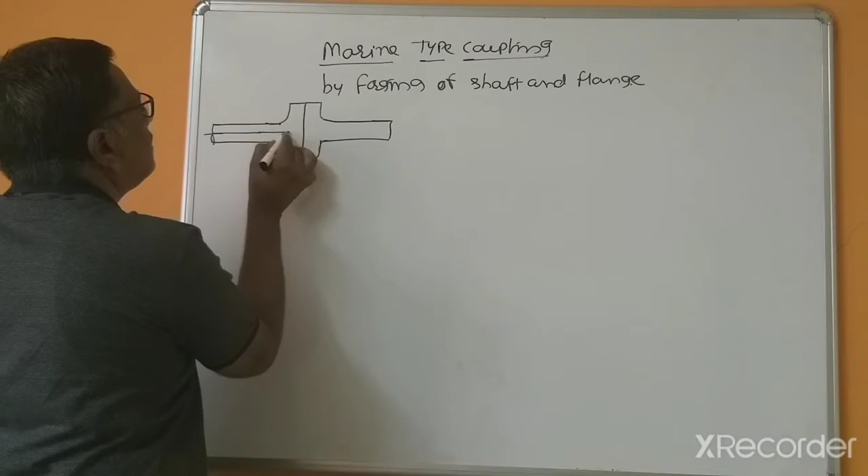Here a taper is provided. This taper is provided at some amount, and here this is a bolt. This is a headless bolt.

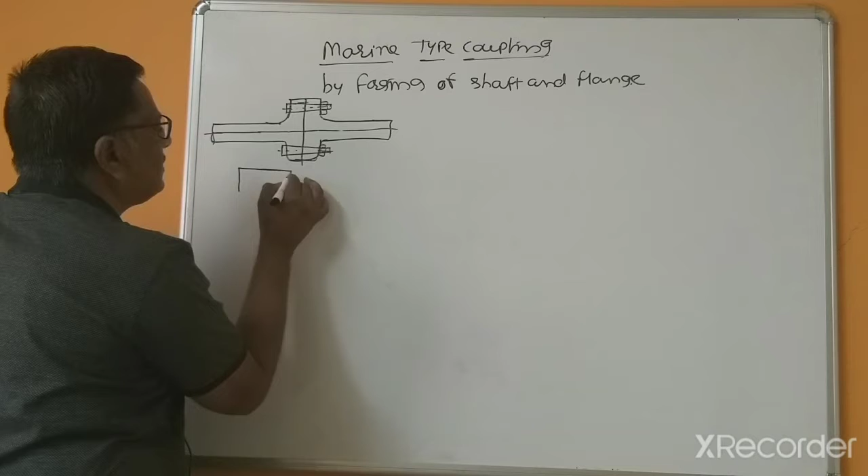The taper is generally shown by such type of threading, and this is a headless taper bolt. This taper is generally 1:32.

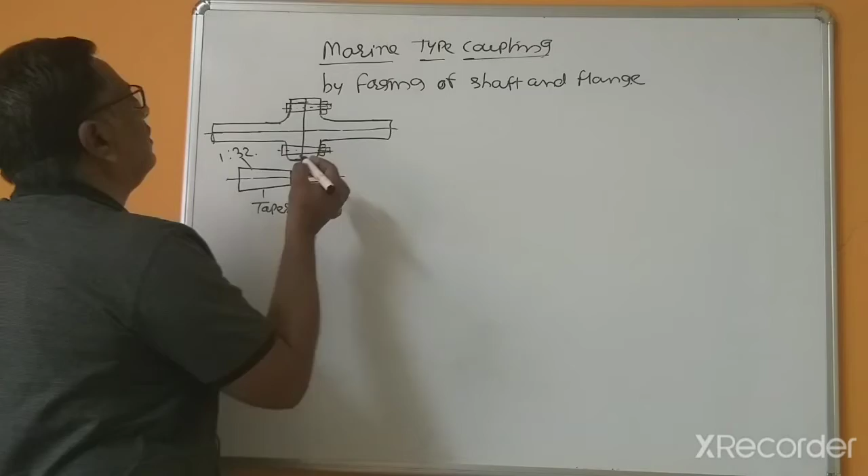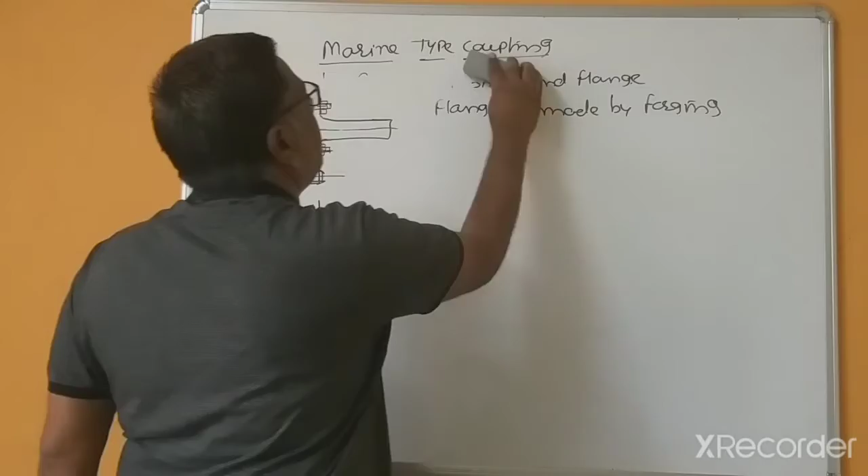So by forgings these flanges are made, or you can say flanges are made by forging. This shaft also is manufactured by using forgings, hammering. Because of these forgings, the strength increases.

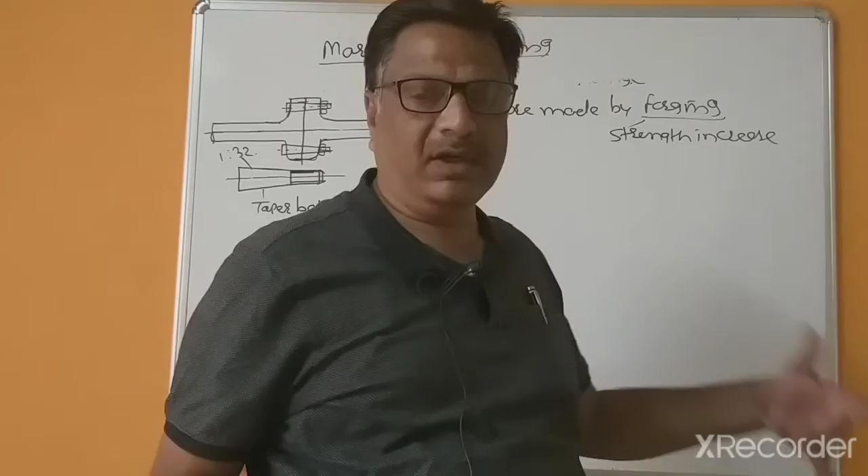A higher factor of safety is to be used, because if the coupling fails, this marine coupling is running in the seas. So the strength of the coupling, meaning the factor of safety or reliability factor, is very important. That's why this is made from forging.

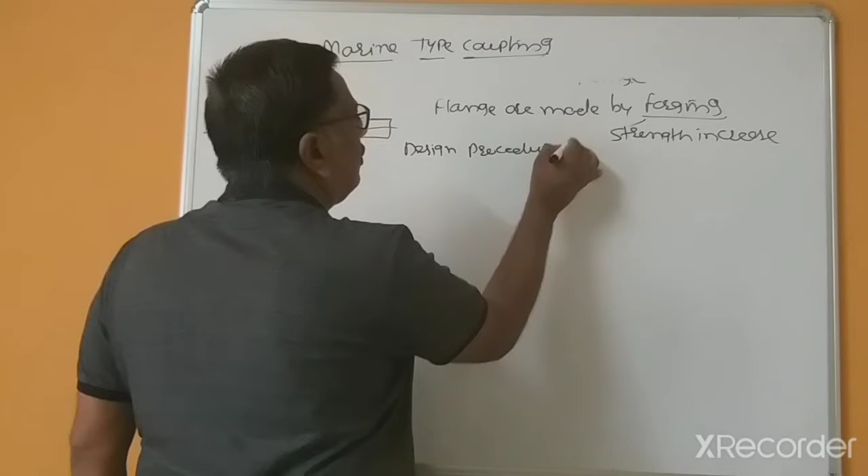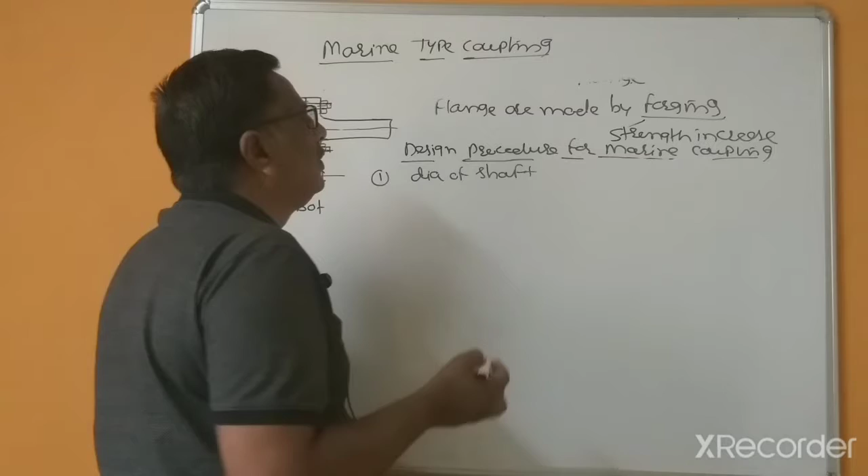And here is the design procedure for marine coupling. This is a very small design procedure. First is the diameter of the shaft, input and output shaft. This is the minimum diameter of the input and output shaft.

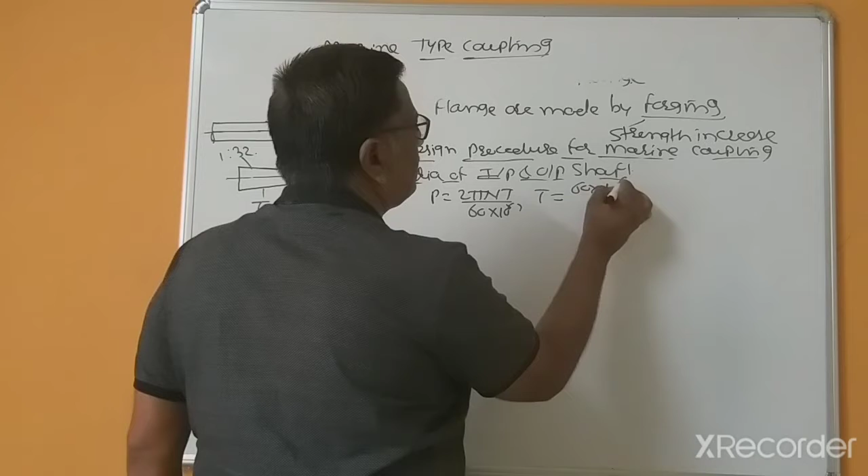You can find this by using P equal to 2 pi NT divided by 60 into 10 to the power 6, so T equal to 60 into 10 to the power 6 multiplied by P divided by 2 pi N. Here T is in Newton mm, P in kilowatt, and N is the RPM.

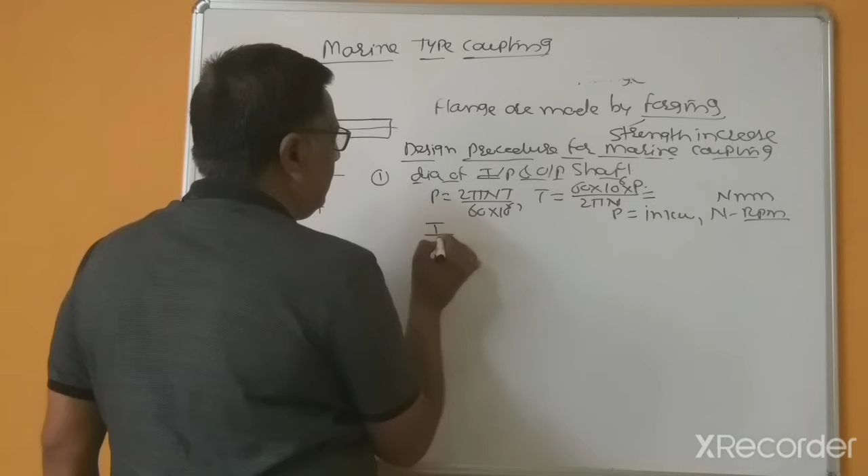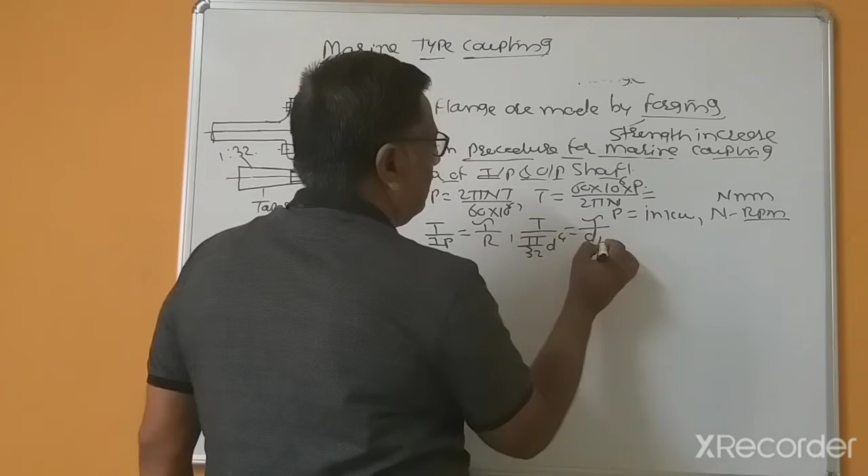By using these relations, T divided by polar moment of inertia equal to tau divided by R. Since this is a solid shaft, T divided by pi by 32 d raised to 4, tau divided by d by 2. So tau equal to 16T divided by pi d cube, or d equal to cube root of 16T divided by pi tau. This is the first step, diameter of the input shaft.

Now, this is not for checking purpose, this is the design diameter of the shaft.

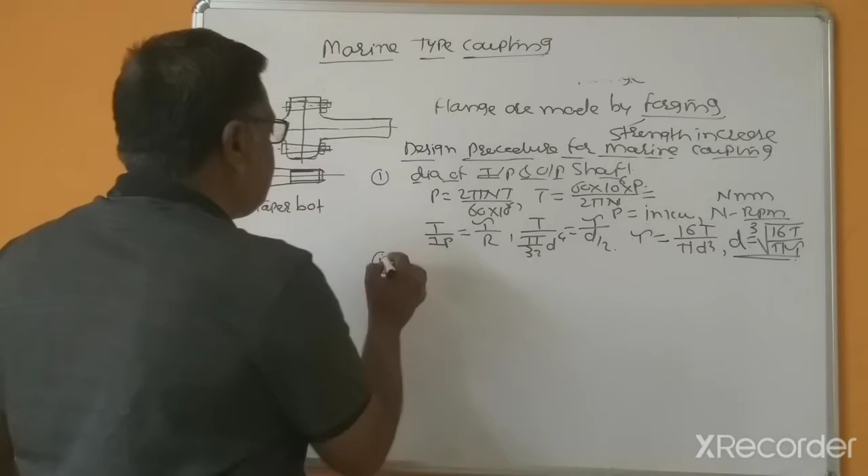Second step, because here another component is the bolt, so design of the bolt. But before that, dimensions of the coupling. These are the various dimensions about the coupling.

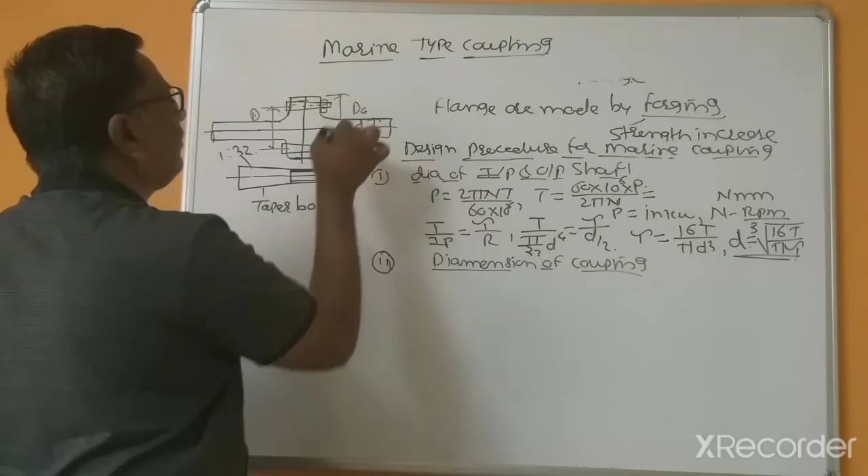This is the outer diameter, and this is the pitch circle diameter, capital D, and this is the small d. So the pitch circle diameter PCD equal to 1.6 times d, and the outer diameter equal to, this is a general relation, 2.2 times d.

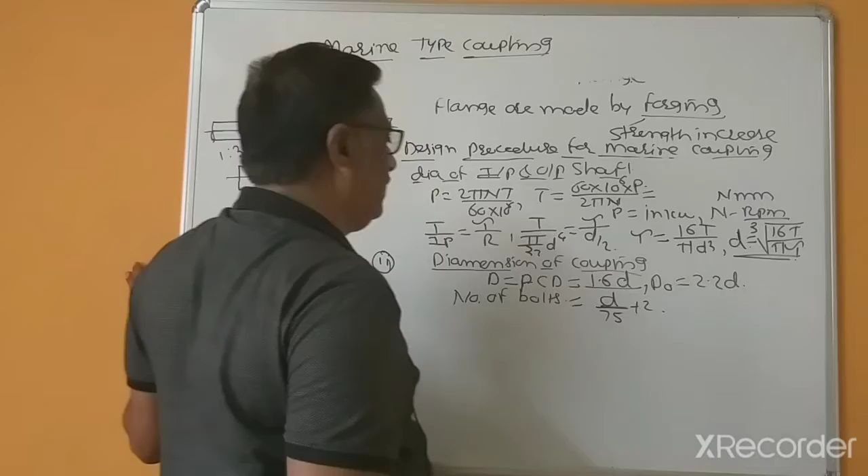And the number of bolts equal to d divided by 75, plus 2. This is the relation for finding out the number of bolts.

Next, this is without a key, because the flanges are made by forging, so there is no need of keys.

Last step, design of the bolts. Here you can add a checking step, checking of the coupling.

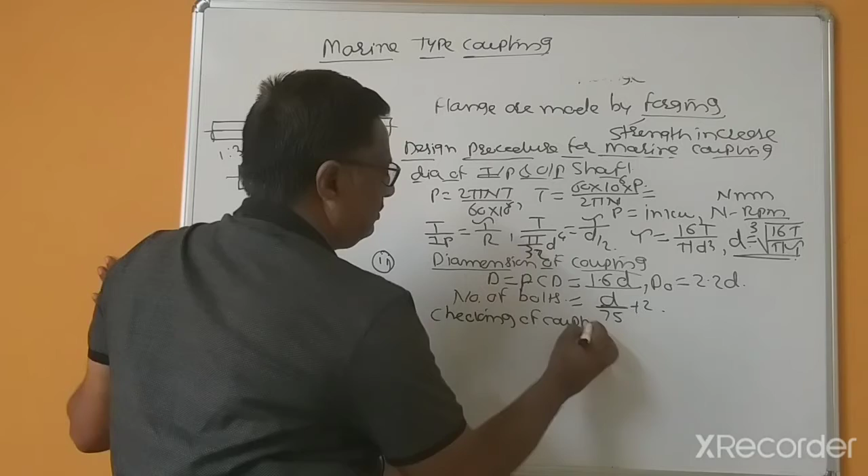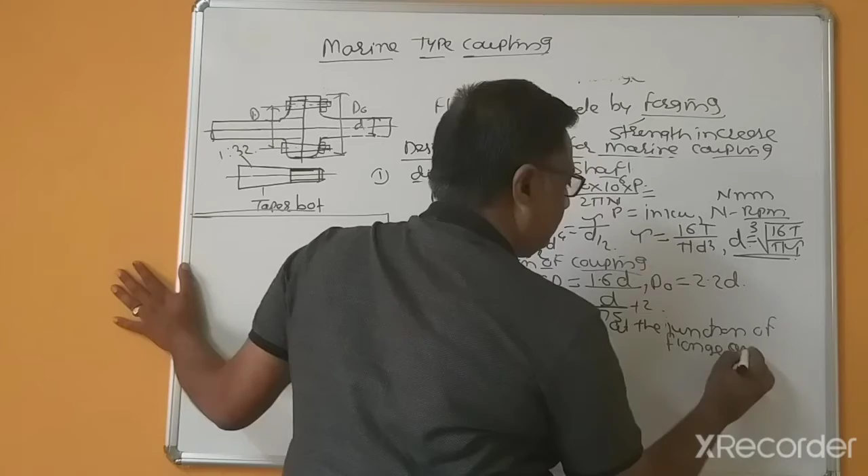After that I will add checking of the coupling, because chances of failure of the coupling are here at the junctions, at the junction of flange and hub. Here this is the flange, and you can say this is the shaft.

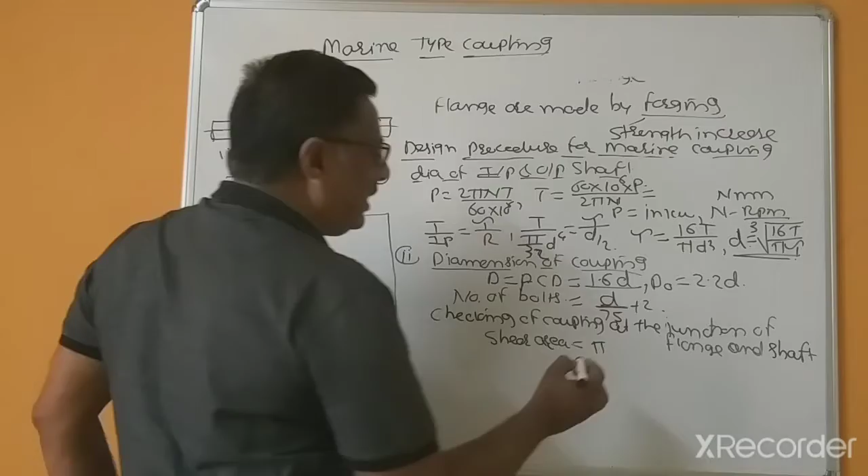So the shear area equal to the shear area circumference, d is the diameter, pi d, and this t is the thickness.

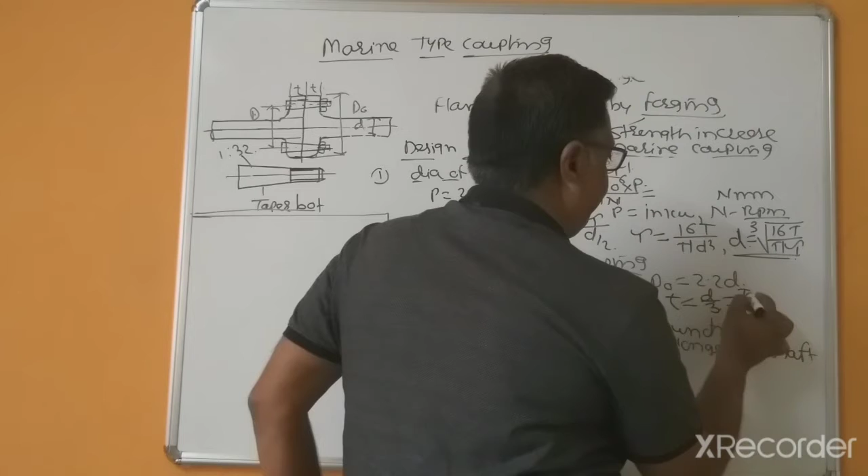Yes, t is the thickness, and this is d by 3, thickness of the flange. This is also important, d by 3, thickness of the flange, multiplied by d.

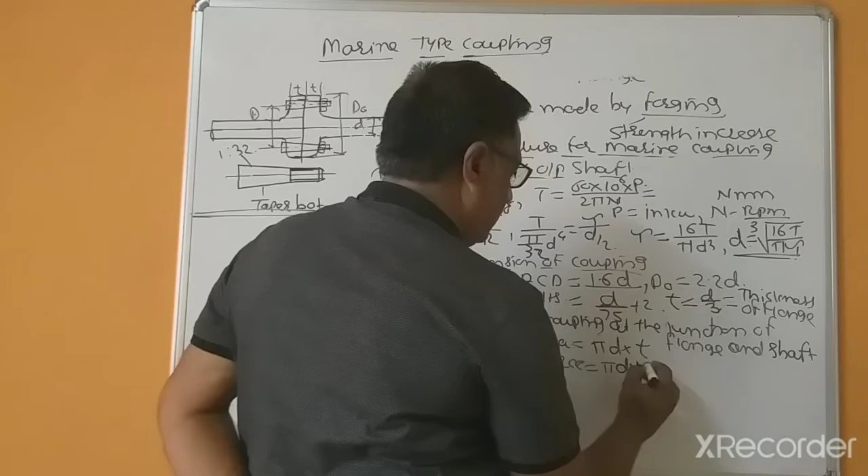Now shear force equal to pi d, sorry, this is t, because this is t, pi d into t multiplied by tau. Tau is the shear stress of the material, and torque equal to

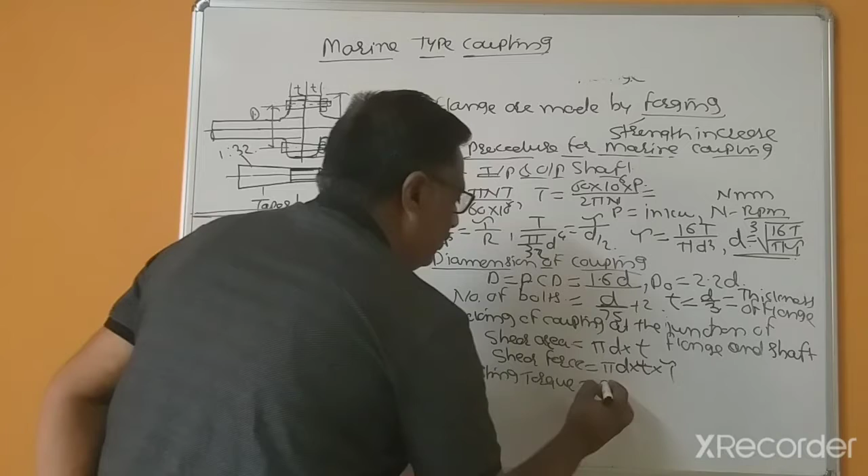resisting torque equal to shear force multiplied by radius. So that's why here we can write pi d t into tau, radius equal to d by 2, and this is t.

So tau equal to 2t divided by pi d squared into t. Here's check design is safe or not safe.

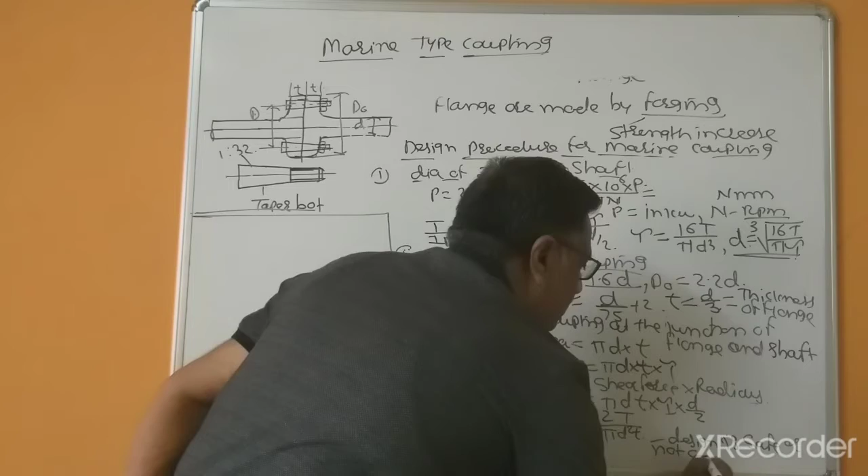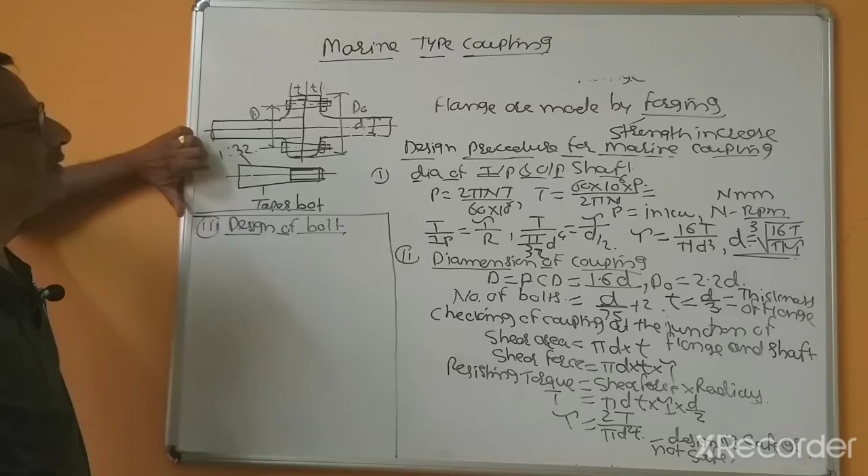This is second step, and the third step. So this is last step, design of bolt. So this bolt is the, and here's this is mean diameter d1. d1 is the mean diameter of a bolt,

right? So that's why shear stress and chances of failure is due to direct shear stress. So that's why tau equal to formula force acting, and this is P divided by pi by 4 into d1 squared, and this is force acting on each bolt. Otherwise I will write this is P equal to force acting on each bolt.

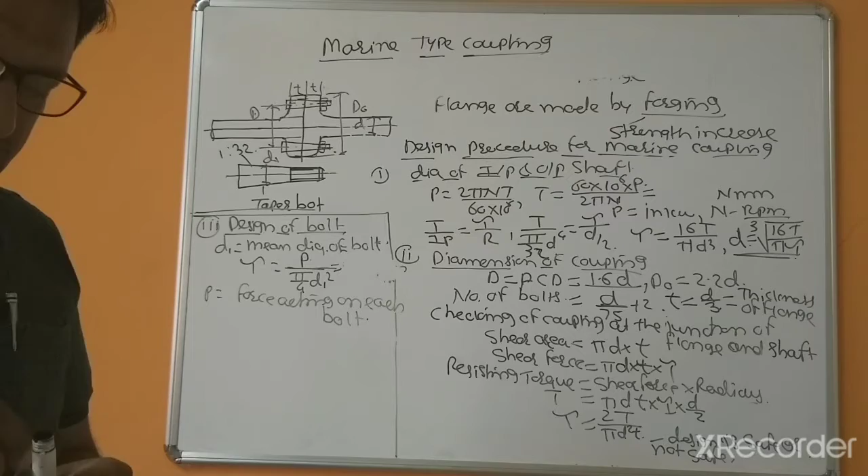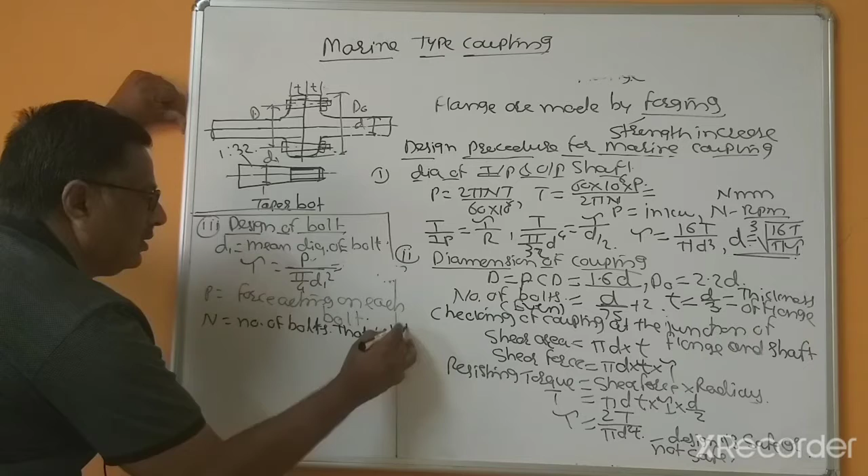Alright, so P equal to, how you can calculate N equal to number of bolts. Here's one sentence is required. Yes, I will add here, in brackets, this is even. Bolt should require is the even. So N is the number of bolts and that is to be even only.

So that's why here's number of the bolts equal to this formula N equal to, and force acting on each bolt, how you can calculate: T equal to N into P1 multiplied by this is capital D divided by 2, or P1 equal to 2T divided by dn.

So that's why here tau equal to 2T divided by dn multiplied by pi by 4 d1 squared, or d1 equal to 8T divided by pi dn into under root, and this is tau. So here you will get d1 is the diameter.

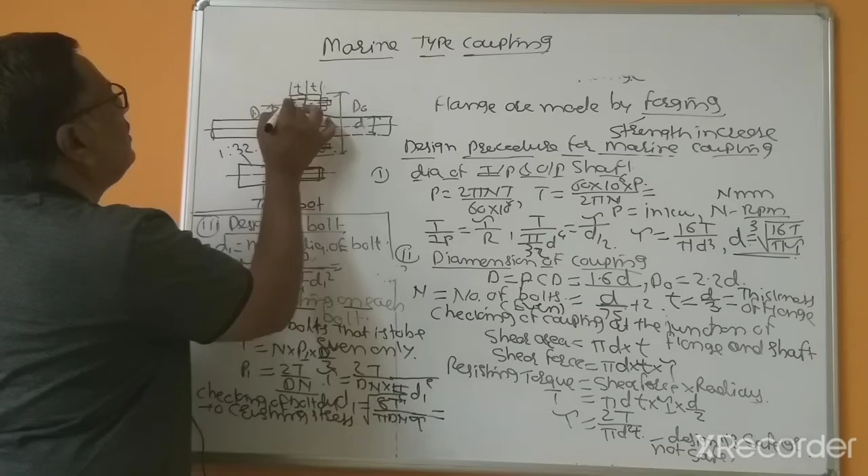Now checking purpose, checking of bolt due to crushing stress. So this is last step. So here's failure of the bolts due to crushing, because this area is the crushing area, this area is the crushing area. So that's why D and this T is the thickness.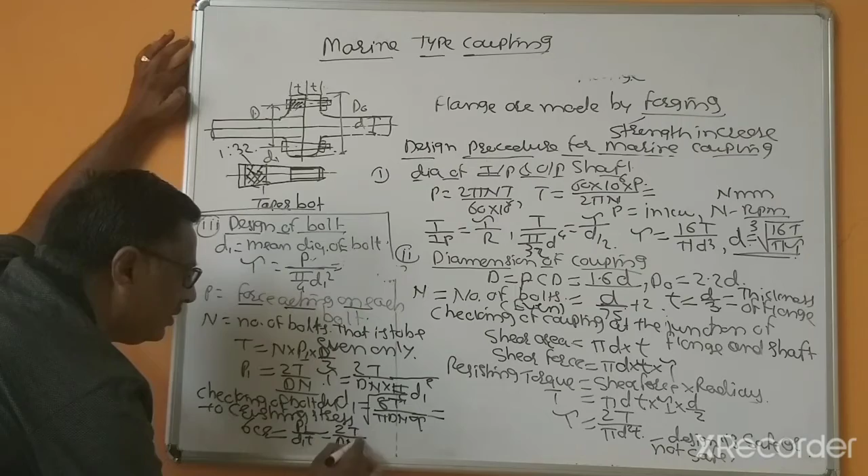So that's why checking purpose, crushing stress equal to P1 divided by area D1 into T, and P1 equal to 2T divided by dn into d1 small t. So this is the last step.

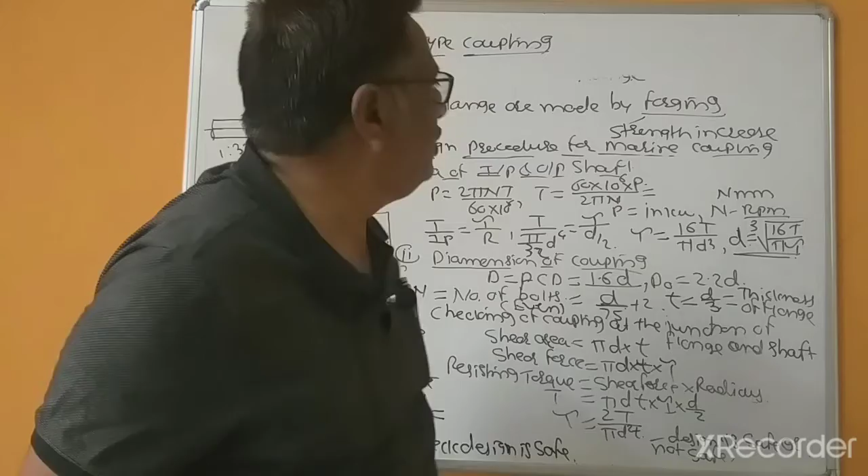So here check design is safe. So this is last step. That's why within 3 steps you can design the marine coupling. So problems are easy for marine coupling. So you should only know what is the design procedure.

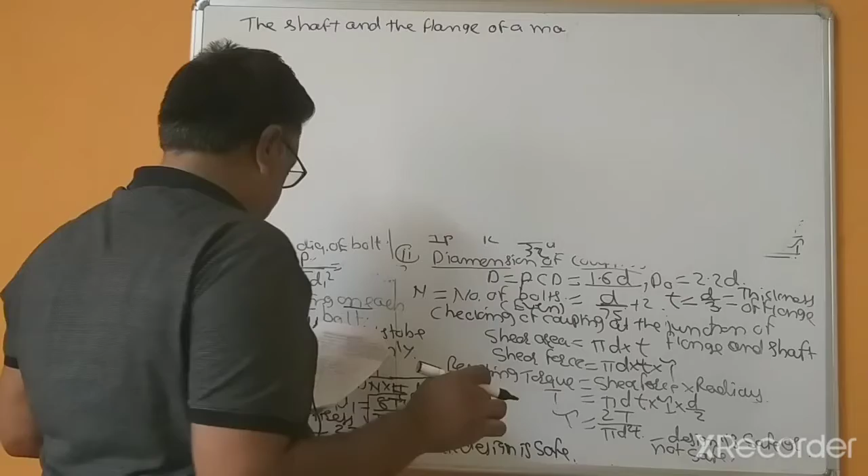So first note down today's first problem. The shaft and the flange, the shaft and the flange of a marine engine are to be designed for flange coupling

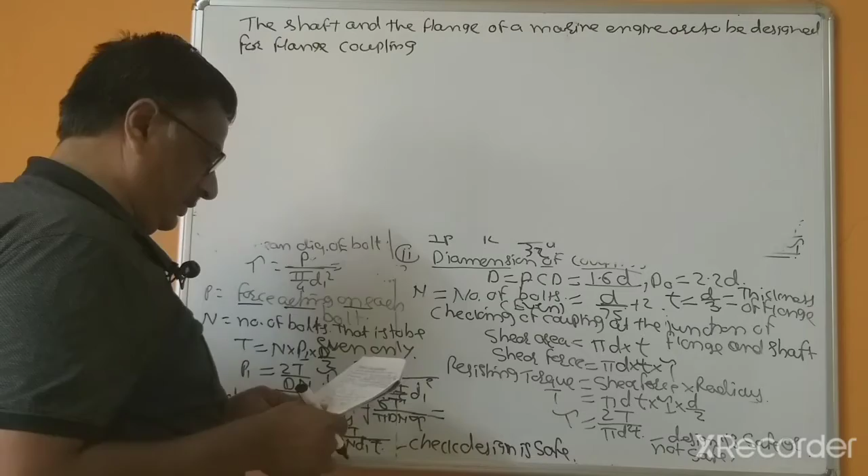in which the flange is forged on the end of the shaft, the following particulars are to be considered in the design.

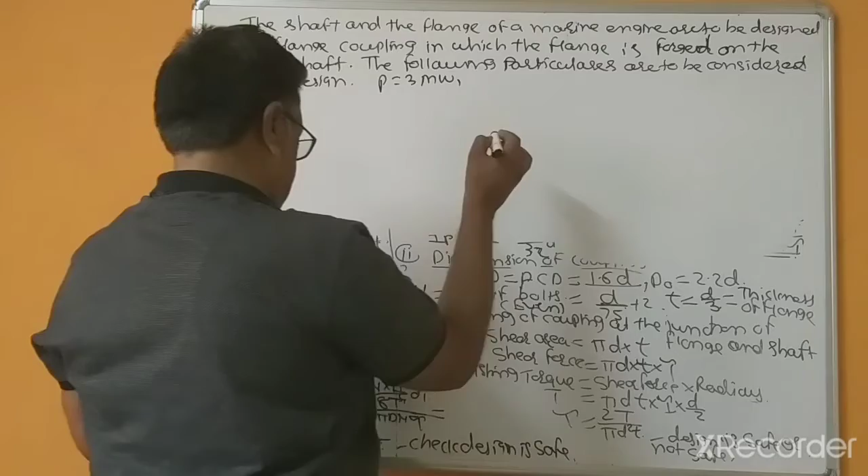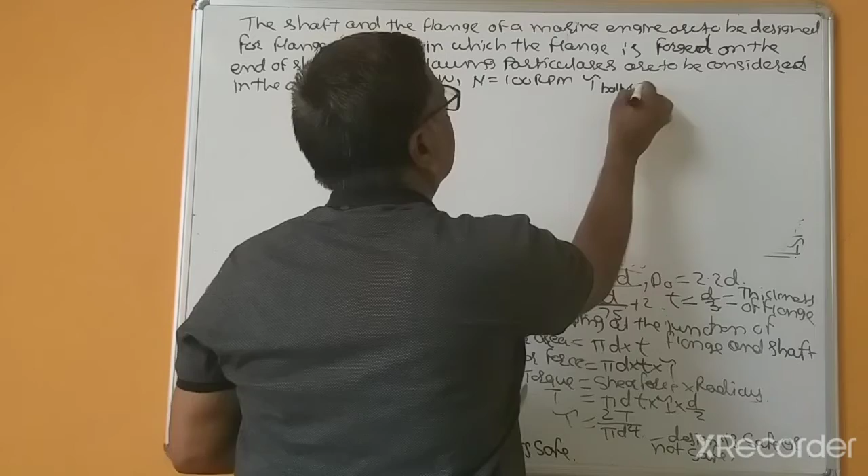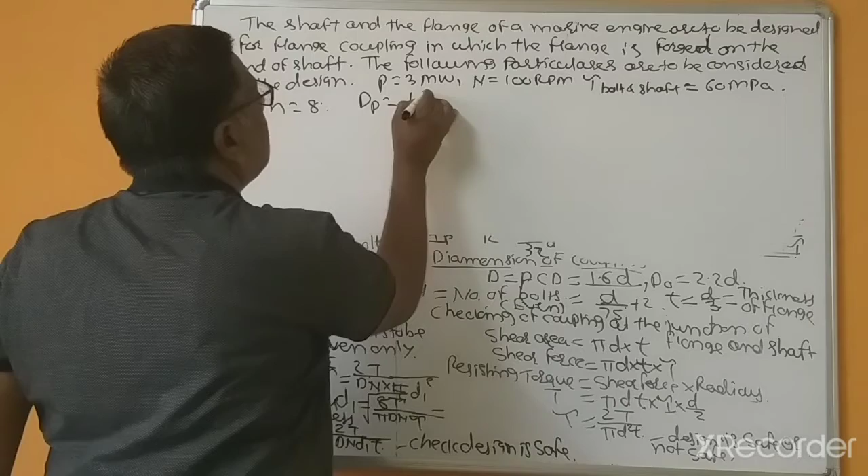P equal to 3 megawatt, capital N this is 100 RPM, tau for bolt and shaft this is given 60 megapascal, small n equal to 8, dp pitch circle diameter, and this is given dp, pitch circle diameter. P stands for pitch circle diameter. This is a standard empirical relation given for diameter of shaft.

So this is important data. Right? And I split our board into 3 parts. First step, design diameter of input and output shaft. So this step is common for every coupling.

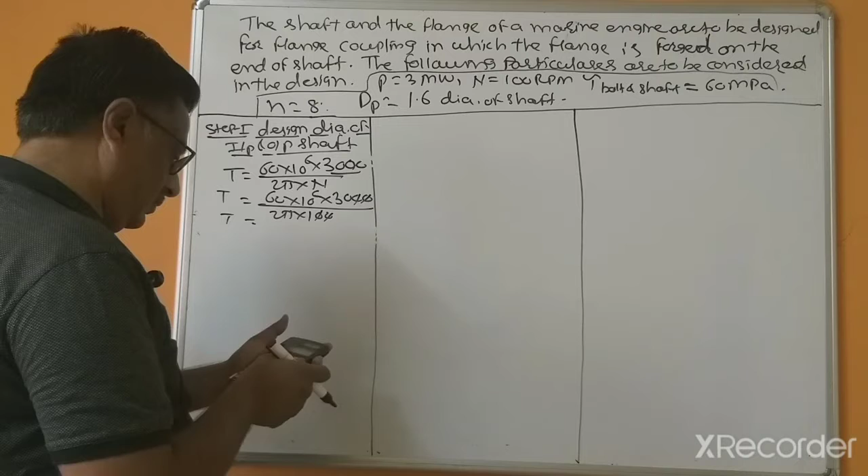So that's why T equal to 60 into 10 to the power 6, and this is 3 megawatt. 3 megawatt means kilowatt, this is 3000, divided by 2 pi RPM, equal to N is the RPM, 60 into 10 to the power 6 multiplied by 3000 divided by 2 pi RPM equal to hundreds, and this will get cancelled.

60 into 10 to the power 6 multiplied by 30 divided by 2 divided by pi, and this is equal to 286,478 into 10 to the power 3 Newton mm. And D, diameter of the shaft, by using the relation 16T divided by pi into tau equal to, so that's why this is 286,478 divided by, no necessary to 10 to the power 6. We already consider this is pi into tau equal to 60, and this is cube under root D equal to

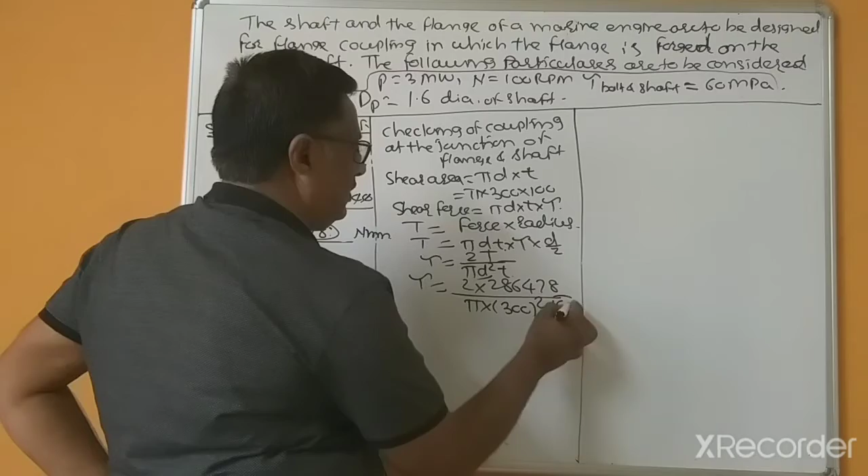This is 286,478 divided by pi into d, where diameter is 300 squared, t equal to 100, tau equal to 286,478 multiplied by 2 divided by pi divided by 300 squared divided by 100.

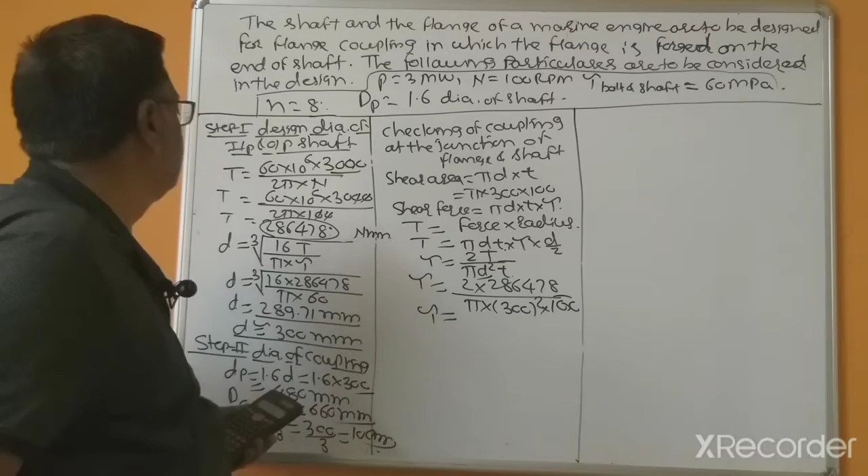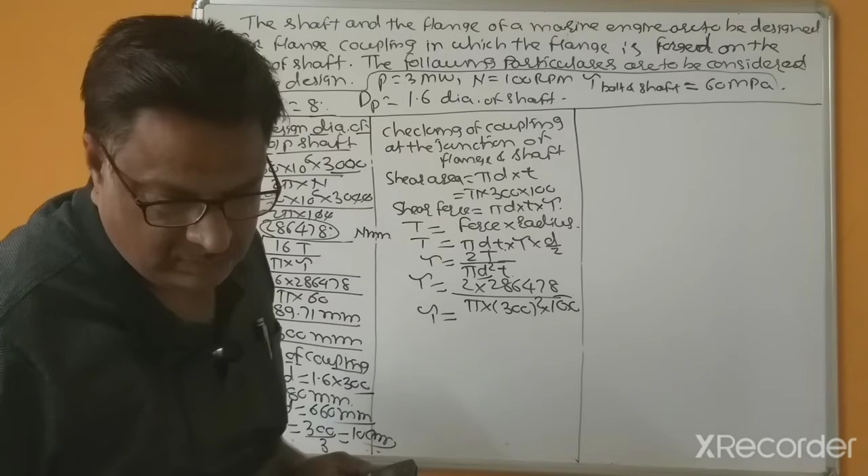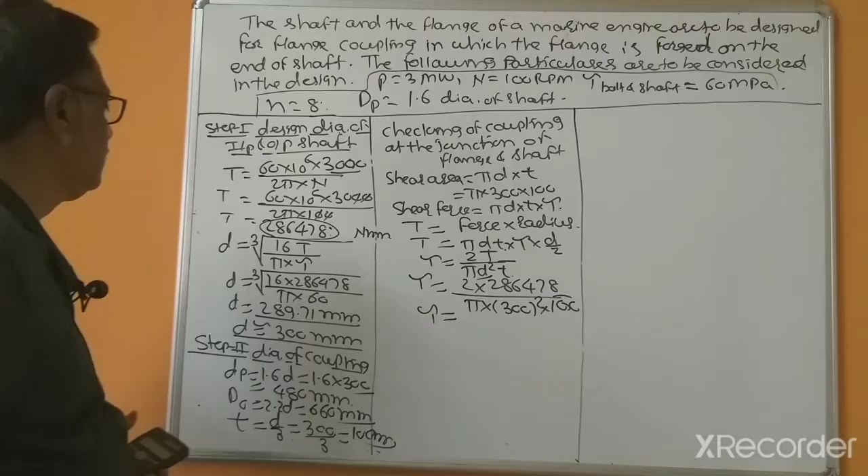I wonder if I did any mistake because I got this is 0.20. So I did make a mistake, as this is 30, this is 10 to the power 3. This is correct. That's why here, because this is very large, 10 to the power 3.

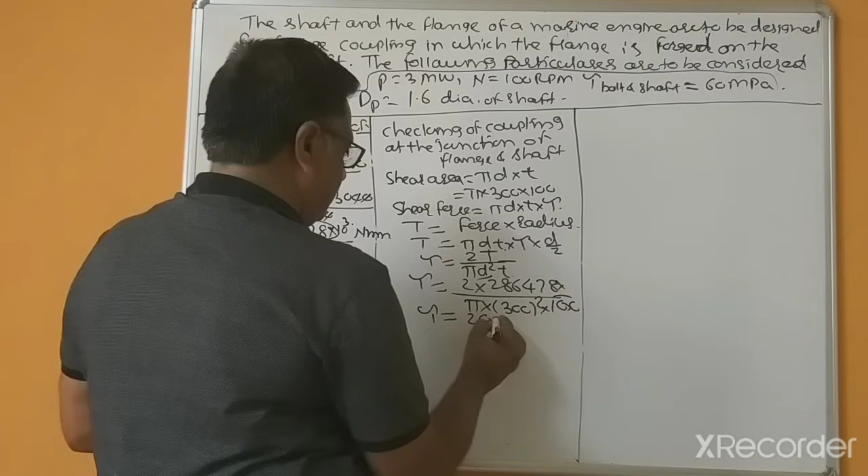This is 20.26 mega Pascal. That's why the design is safe.

Second step over. Third step, now step third, design of bolt.

So for design of the bolt, T equal to, yes, number of the bolts, and this is given as 8 number of bolts, and yes, P is the force acting, and this distance equal to d by 2. So that's why torque equal to force acting P into total number of bolts N into d by 2, or force means this is 2T divided by dN.

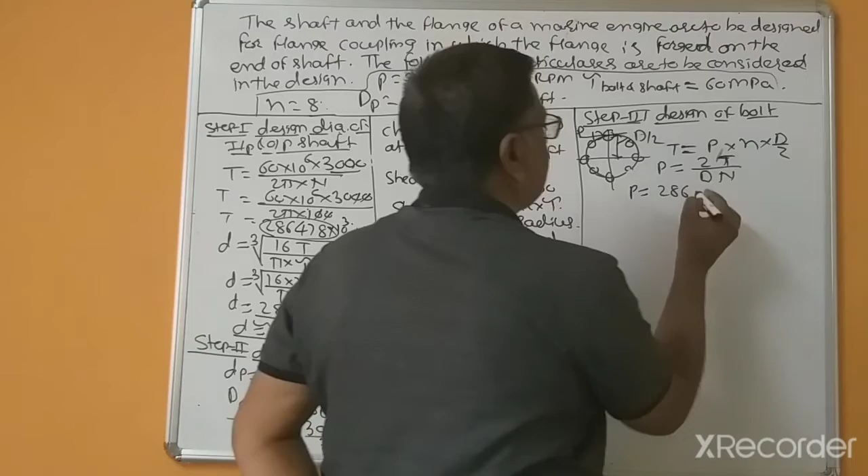286,478 into 10 to the power 3 divided by, and this is capital D, pitch circle diameter, and this dP is 480, and this N is the small n, and this is given number of bolts, 8, that's why this is 8.

So force acting on each bolt: 286,478 multiplied by 1000 divided by 480 divided by 8, and this is 74,603 Newton.

This is clear. And force acting's direct shear stress equal to tau equal to force divided by pi by 4 d1 squared. So that's why d1 equal to under root of 4P divided by pi into tau.

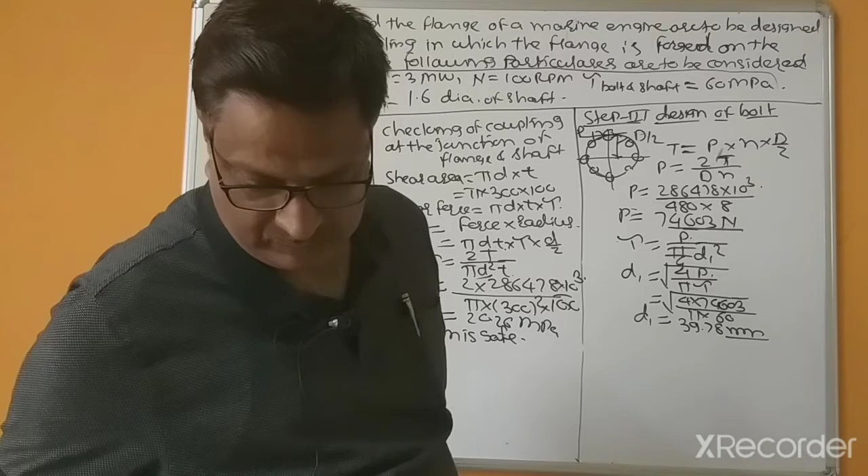I will check this because this is the first problem, so I check these answers. This is 148. I will check these answers because this is different.

Why is this different? 286,478 multiplied by 10 to the power 3 divided by 480 divided by 8. This is correct.

So what may be the answer is, this is our answer. So as per our design process, d1 equal to, but my answer is different. So that's why D1 equal to approximately 40 mm. So this is the mean diameter.

Now checking up bolt for crushing, because this area is the bolt cross section, so this may wear due to crushing, likewise may wear out. So that's why D is the diameter and T is the thickness above the flange. So crushing stress equal to formula P divided by D1 into T.

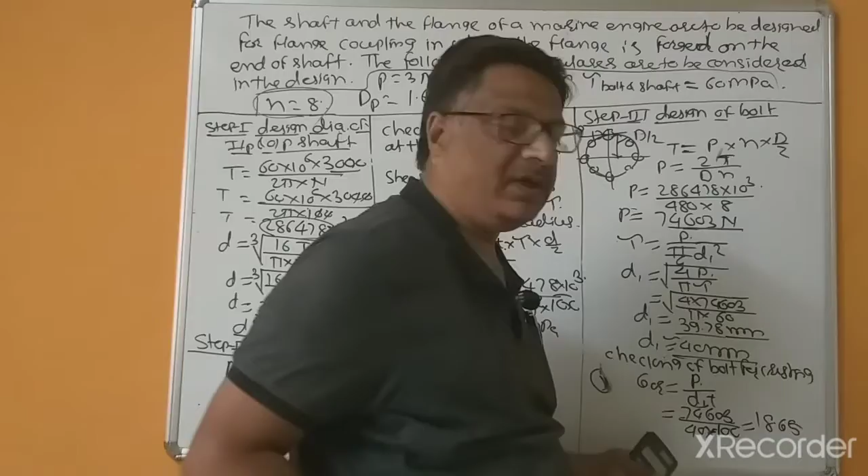So this is the first problem. We'll see the next problem.

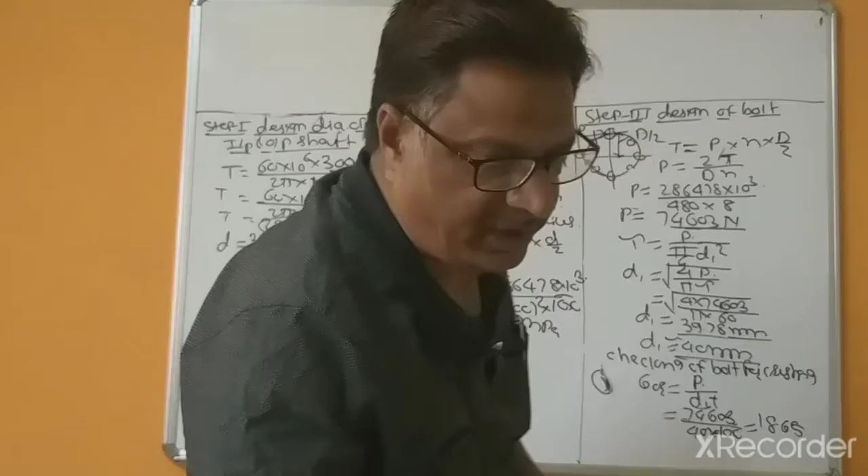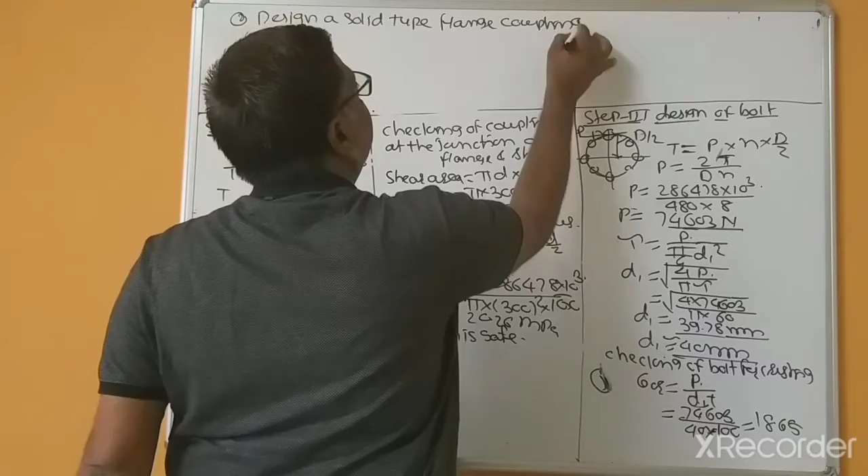Design a solid type flange coupling. Second problem: design a solid flange coupling for connecting a turbine shaft.

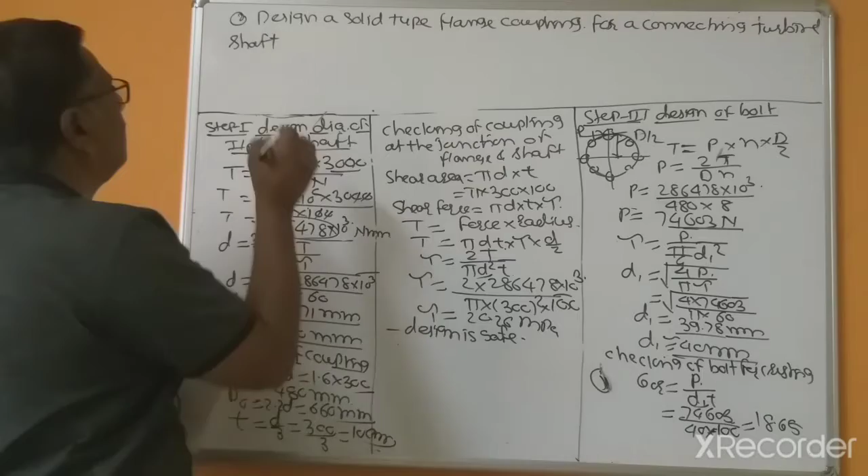Transmitting 5 megawatt power - this is important, 5 megawatt power at RPM - this is also important, 3000 RPM. The permissible shear stress for bolt.

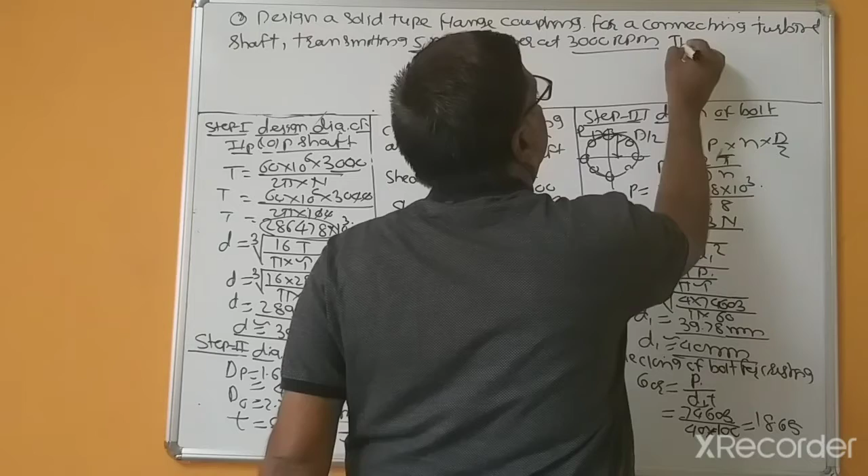The permissible shear stress for shaft and bolts are 90 megapascal and 85 megapascal respectively.

Assume there are 6 number of bolts required. So this is the given data.

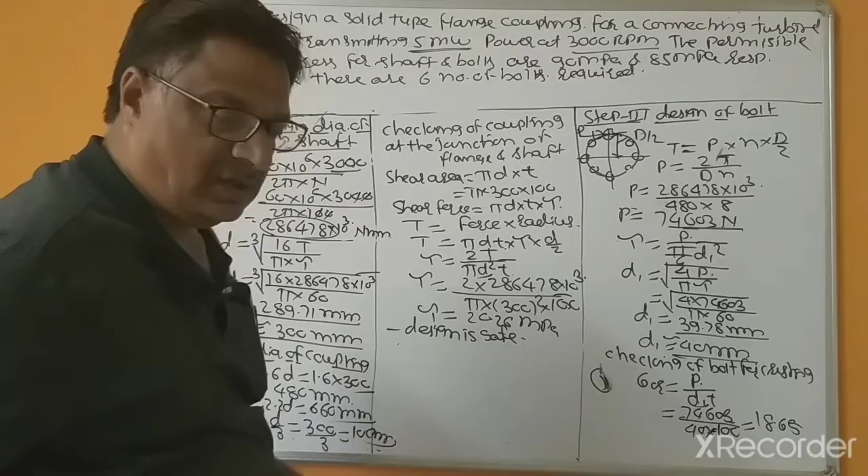So for this problem, I will only edit the data because the design process for every problem is the same. Only numerical values change. That's why I will only change that. First step, design of the design diameter of input and output shaft.

And this is 5 megawatt, that's why this is 5000 kilowatt. RPM changes, this is 3000, right? So this torque will change, and this is 60 multiplied by 5 divided by 3 divided by 2 divided by pi.

This is 15.91 into 10 to the power 6. I will check my answer.

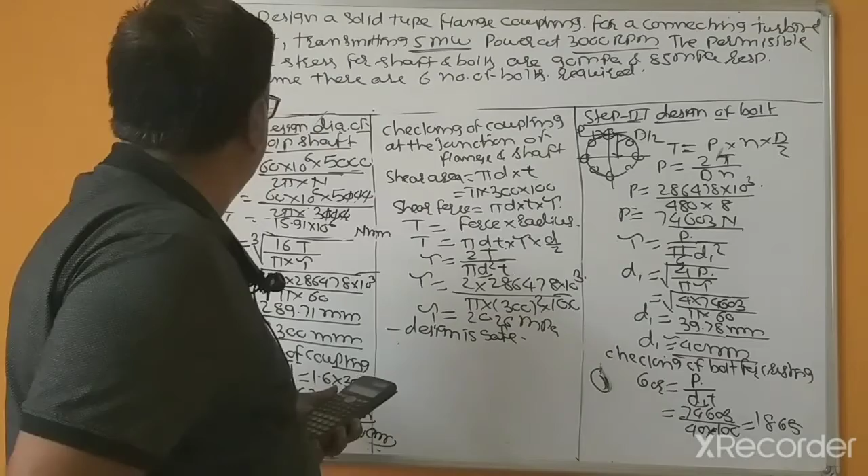Once again I will check. This is 60 into 10 to the power 6 multiplied by 5 divided by 2 divided by 3 divided by pi. This is correct, 15.91 into 10 to the power 6.

And here I will change this to 15.91 into 10 to the power 6, and here's this tau value - this is for shaft, meaning shaft 90. D1 is the diameter.

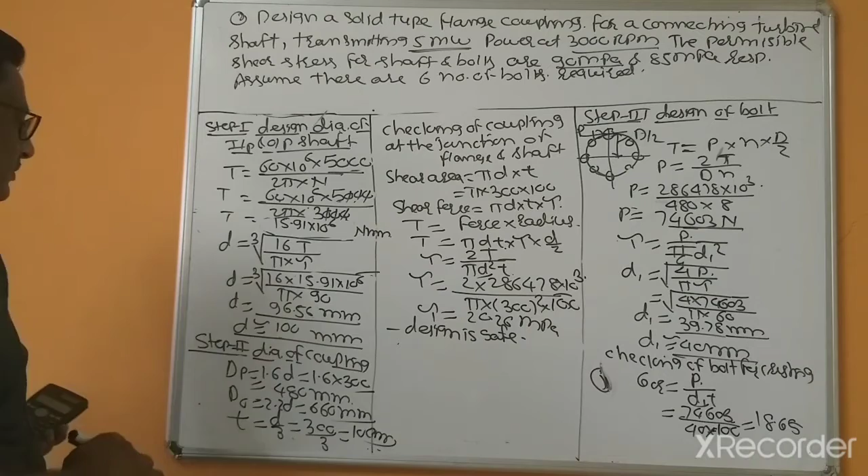So here we put D equal to 100, thickness equal to 34, and here 15.91 into 10 to the power 6, 100 square, and thickness 34. Only I change the numerical values, and we are checking.

15.91 into 10 to the power 6 multiplied by 2 divided by pi divided by 100 square divided by 34, and this is 29.79. So that's why design is safe.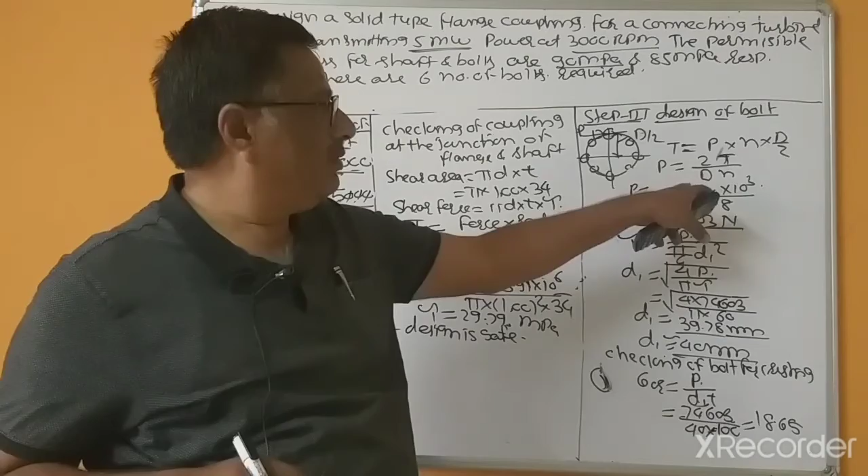Now next step is the design of the bolt. Here we have to change this data. In the last problem we made a mistake; we forgot that 2 points, so these diameters increase. I think this 2t data we missed, but this problem is 15.91 into 10 to the power 6, and this D equal to 220, and N equal to 6 given.

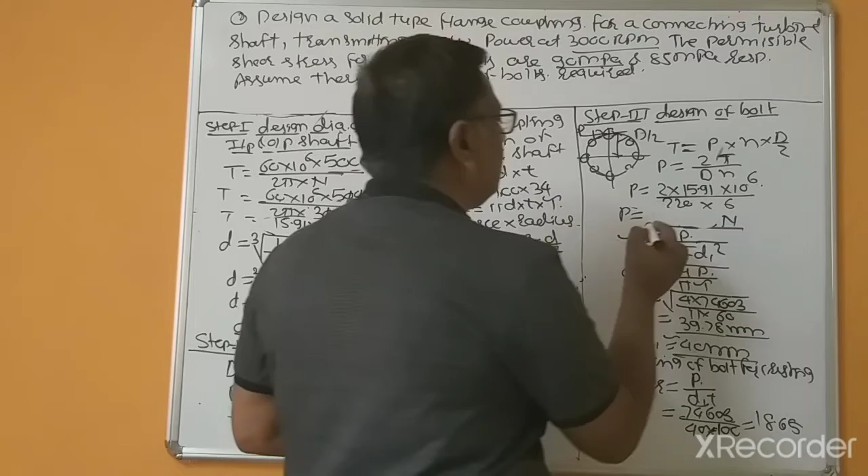Alright, 15.91 into 10 to the power 6 multiplied by 2 divided by 220 divided by 6, and this is 24,106. That's why I changed this value, and this tau equal to 85, multiplied by 4 divided by pi divided by 85, and this is under root, so this is 19.0. Suppose this is 20 mm.

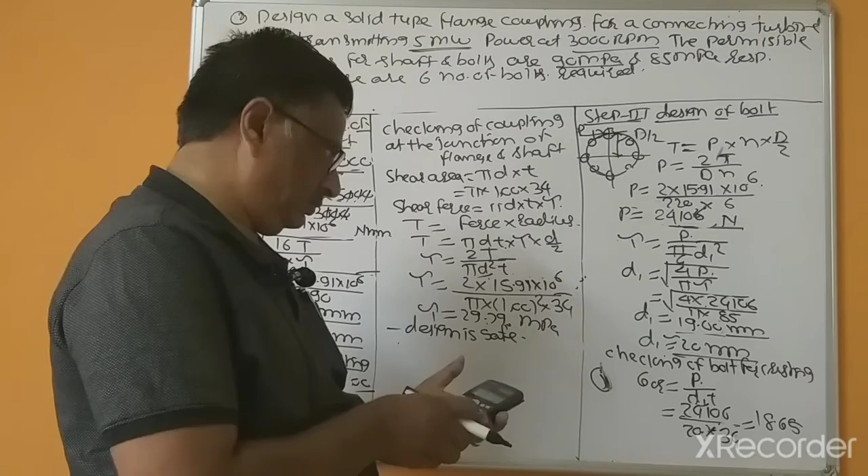Now P equal to 24,106, and this D equal to 20, thickness I slightly increase to 35, and this is 34.45 megapascals. So that's why I can write here the design is safe for coupling. This is clear.

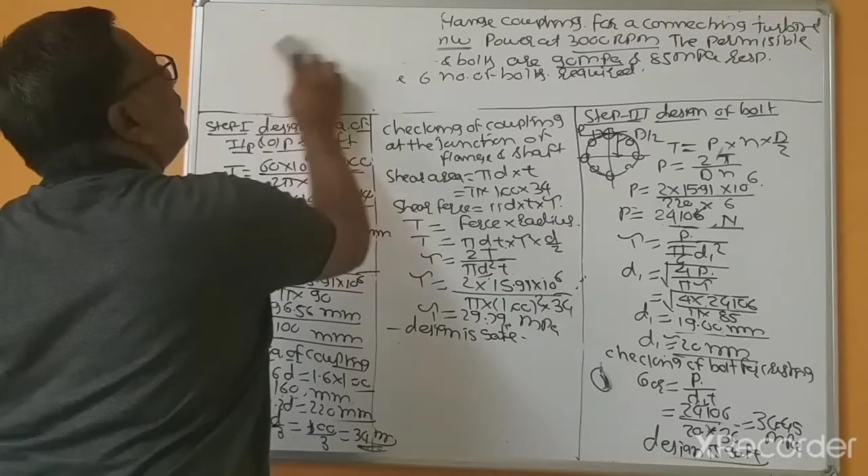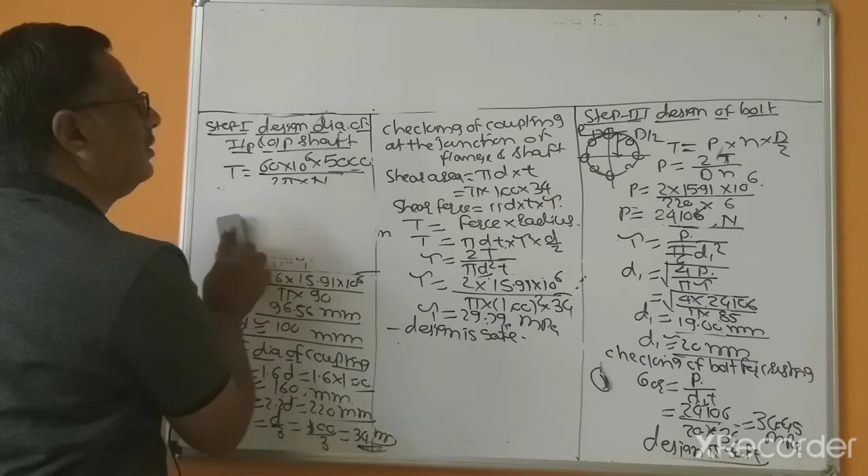Now we'll see the last problem, that is based on the design of the coupling. And this I erase by keeping, because this I require, and I will keep this as it is, because these are the common steps.

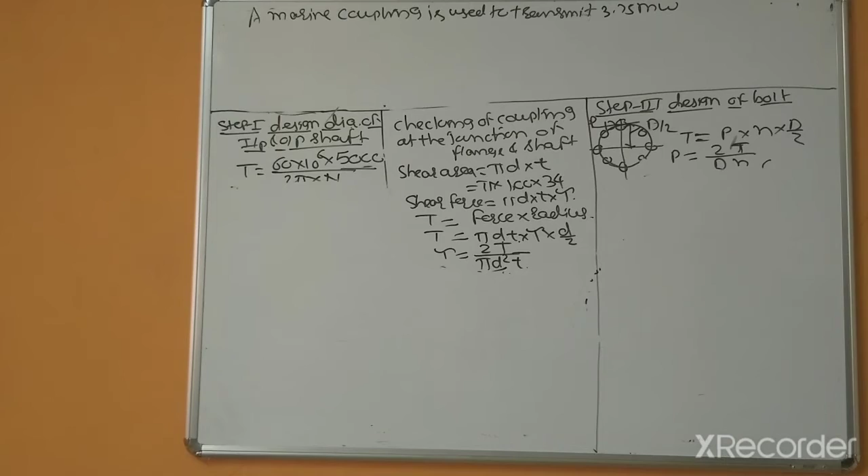Done. Last problem: design of the couplings. A marine type coupling is used to transmit 3.75 megawatt at 150 RPM. The permissible shear stress in the shaft, and permissible shear stress in shaft and bolts, may be taken as 50 Newton per mm squared.

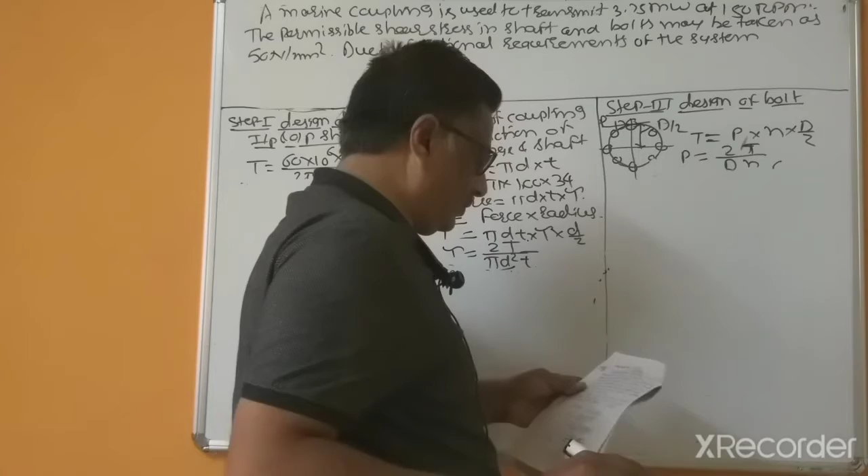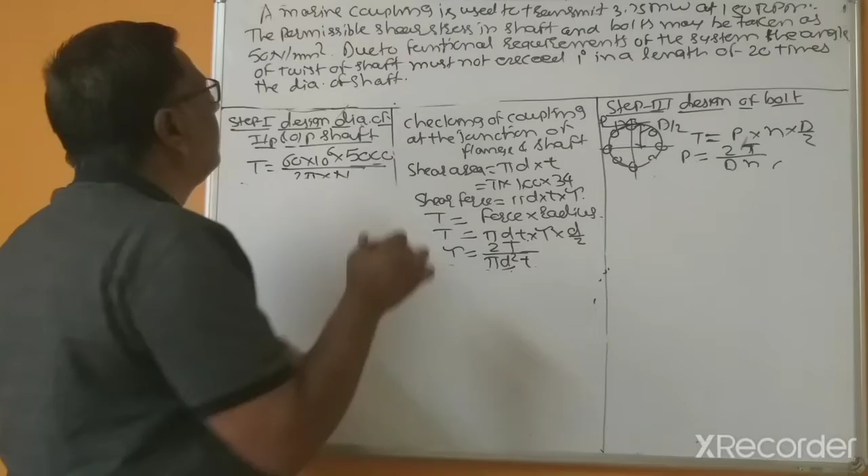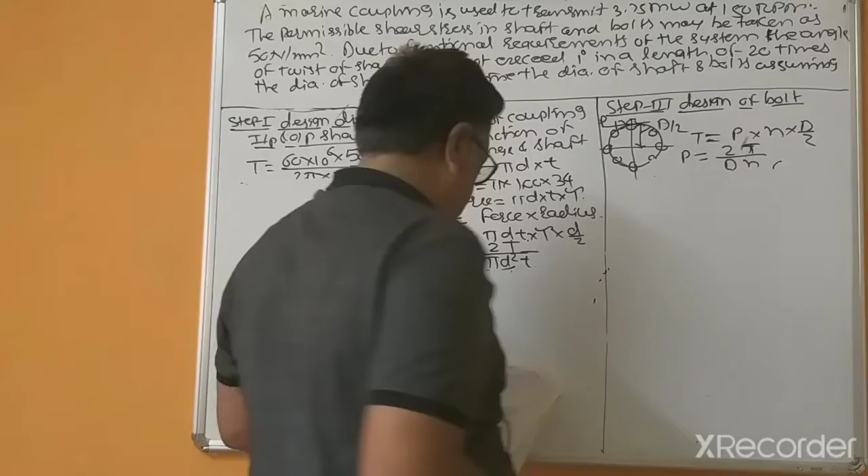Due to functional requirements of the system, the angle of twist of the shaft - this is an additional step - must not exceed 1 degree in a length of 20 times the diameter of the shaft. Determine the diameter of shaft and bolts, assuming 10 bolts. Take G equal to 0.83 into 10 to the power 5.

This is given data. So first, in this problem, design of the shaft is based on the shear stress, and design of the shaft is also based on the rigidity. So that's why T equal to P into 60 into 10 to the power 6, P equal to 3750, 2 pi RPM equal to only 150 RPM.

T equal to - we'll keep 10 to the power 6 as it is, and we'll only multiply 60 into 3750 divided by 2 divided by pi divided by 150, and this is 238.7 into 10 to the power 6.

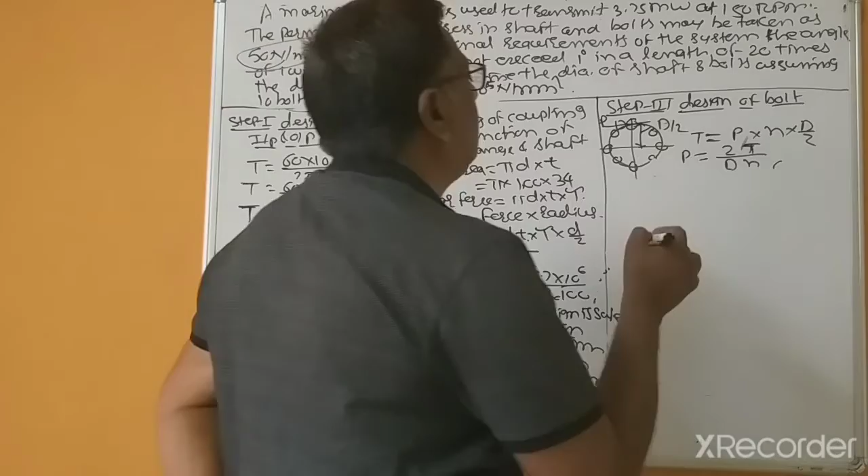These are the important dimensions. Now P is the force acting on each bolt, so this equals 238.7 into 10 to the power 6, D equals 480, and the number of pins given is 10 bolts.

So that's why here divided by: 238.7 times 10 to the power 6, multiplied by 2, divided by 480, divided by 10. This equals 99,458 Newtons. This is important, Newton.

And shear stress, this equals P divided by area, P is 99458, shear area pi by 4 d1 squared, or d1 equals under root.

This is 4 multiplied by pi, divided by tau equals 50, because this is the same for the shaft end. 99458 multiplied by 4, divided by pi, divided by 50, and this is under root. This is 50.32.

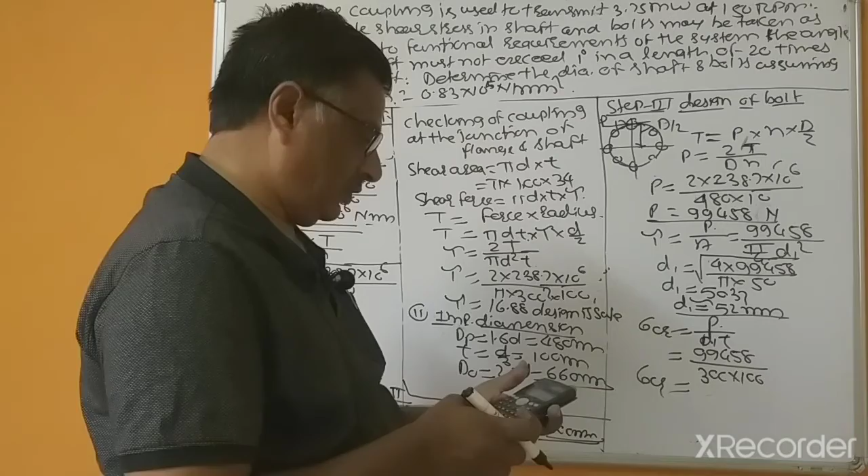And the last step is checking the crushing stress, this equals P divided by d1 into t. 99458, d1 is 300, this is 100. So this is 99,458 divided by 300, divided by 100, which is 3.31.

So you can say the design is safe. So the crushing force, this is clear. Design is safe for the bolt.

I completed this chapter, design of shaft and couplings. I took, because this chapter is very important for being a mechanical engineer, so that's why I consumed 20 lectures on the design of shaft. You may have found it hectic, but this is very important because you should become a perfect mechanical engineer.

So that's why I spent more time on the design of shaft, because this is very important for designing purposes, for maintenance purposes, or for production purposes, for erection purposes also. Design of the shaft or design of the coupling is general purpose equipment, these are standard couplings used in various industries and available in the market. So how you can choose the couplings, that's why design of the couplings is important.